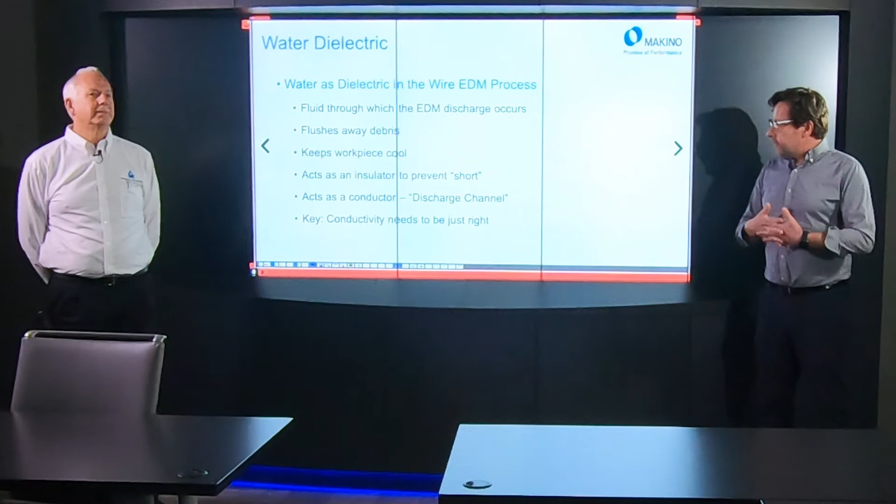So DI resin in the wire EDM. 99% of wire EDM machines use water as the dielectric fluid. And the dielectric fluid in the EDM process is the fluid through which the EDM discharge occurs. The dielectric, what it also helps with is flushing away all the debris that is generated in the EDM process. So all the small particles, get them out of the cut zone, out of the EDM zone, out of the spark area, because then if they're not flushed away, then you're going to have secondary discharges. You're not going to be able to hold tolerances or get a decent finish on your part.

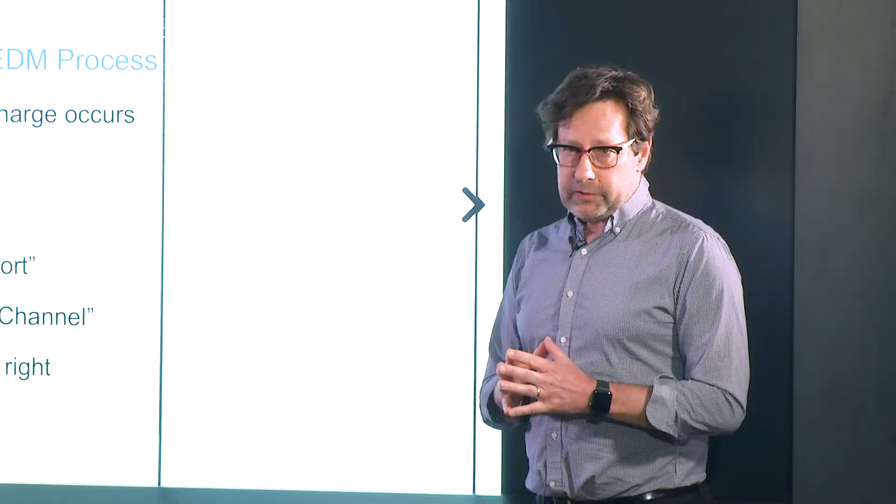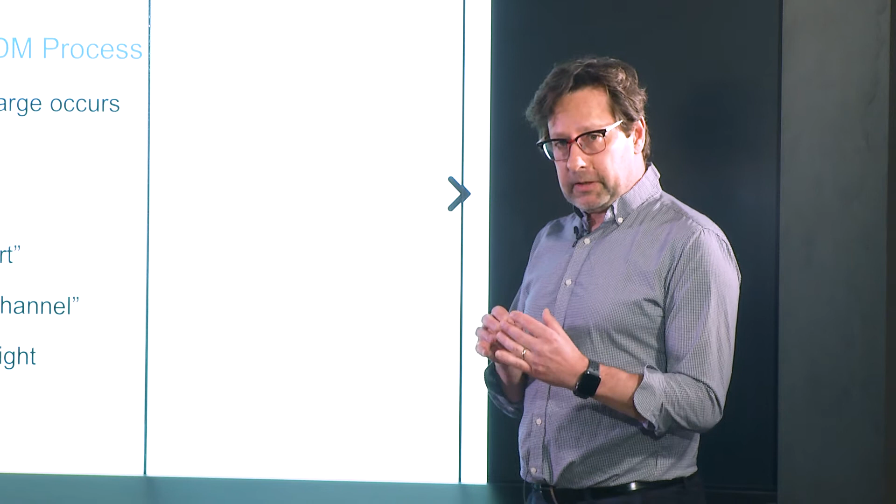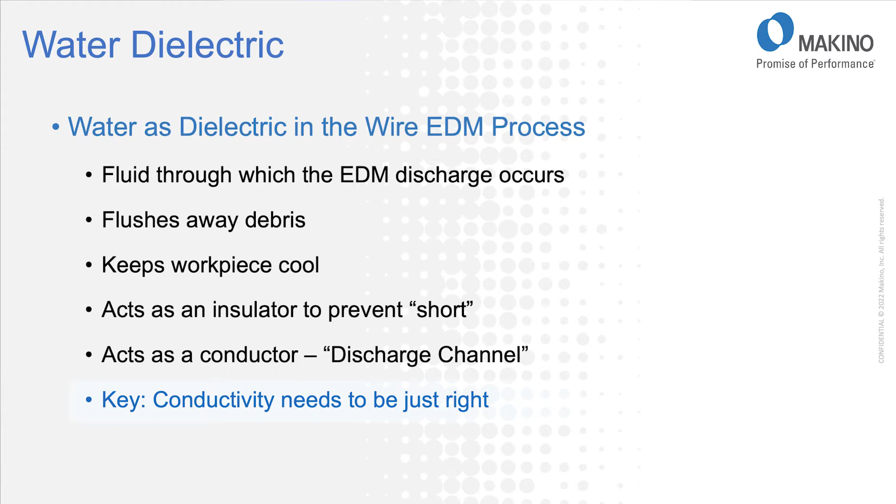The dielectric also keeps the workpiece cool, because we're working with electricity, we're working with a spark that is very hot. So in order to keep the temperature down, that's where the dielectric helps as well. The water also acts as an insulator that prevents the short between the wire electrode and the conductive workpiece. But it also acts as a conductor at the time when the actual discharge is happening. There's a discharge channel that is created through the dielectric fluid, and then we have the spark and we have the EDM process. The key for this to work correctly is that the conductivity of the water dielectric needs to be just right. But what does just right mean?

There are different recommendations depending on the machine manufacturer, but a good overall level that is typically recommended is 15 microsiemens, and that is the conductivity. There are some manufacturers that recommend to run with a lower conductivity, around 10 microsiemens. And then also depending on what you're going to cut, there can be more stringent requirements. For instance, if you cut PCD, in order to keep the PCD's integrity, it is really helpful to work with a lower conductivity. So we're trying to get the conductivity down in those applications to about 5 microsiemens.

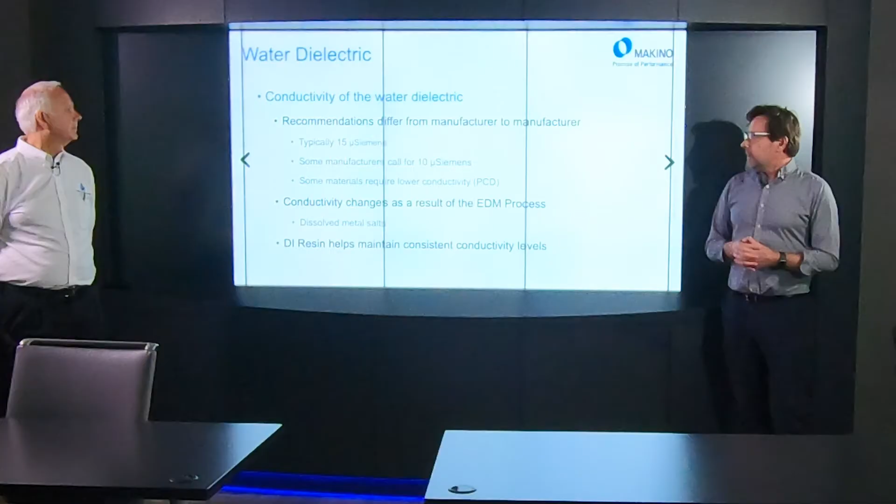Some of you may also hear a different term, which is called resistivity, and it's measured in ohms or in megohms, and it's essentially the inverse of the conductivity measurement. So they both measure the same thing, the same quality, but they're looking at it just from two opposite angles, so to speak.

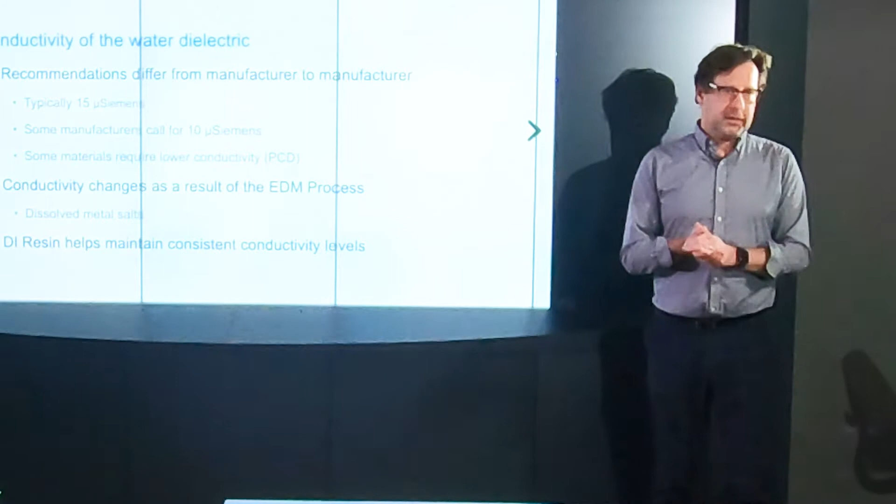What happens during the EDM process is that the conductivity of the dielectric water changes. And mostly that happens through dissolving of metal salts that get absorbed into the water. That's not that dissimilar from if you put table salt into a glass of water or into your cooking water when you cook pasta; it dissolves. And that's what happens during the EDM process as well. And when that happens, the conductivity of your fluid increases. And if it increases too much, then your cutting results are going to deteriorate, your workpiece quality is going to go down, and your overall EDM results are not going to be where you want them to be. And that is exactly where the resin comes in. The resin helps to maintain your water's conductivity levels at the desired point.

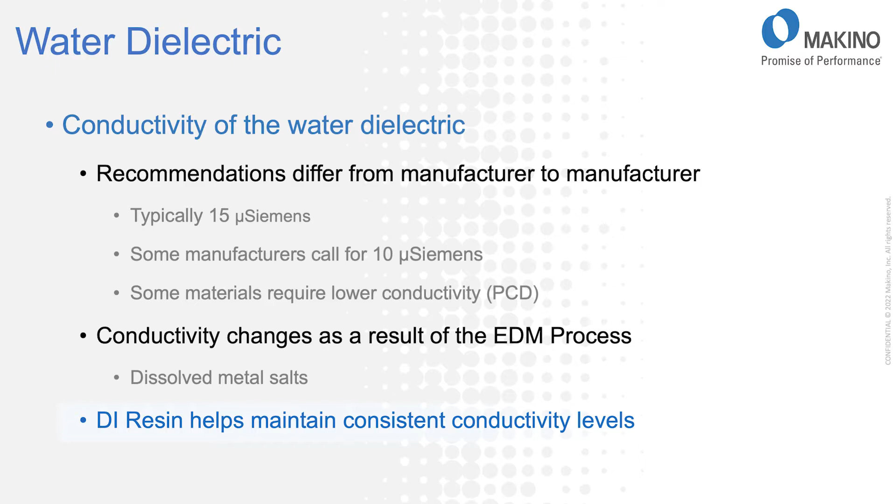Now that we've covered the reasons and the theory of why we need resin to maintain the dielectric in the EDM process, I'd like to hand it over to Bruce Iverson, president of Nationwide DI Water Solutions, to give us a little bit of a glimpse behind the scenes of what happens with the resin when it reaches back to the regenerator or to the manufacturer.

Because, as I think most of you are aware, the resin itself is reused in most cases. So we send it to you, the end user, and once the resin life is exhausted, it comes back to us and we hand it over to Bruce to do a regeneration process on it. So we're not throwing things away; it's almost like a recycling process, I would say.

So Bruce, if you can go ahead. I'd like to thank you, Mark, for having me here today, and Makino and SST for making me part of this video on resin and how it works with the EDM machines.

I have been in the business for 36 years, and we have a total of 8 employees at Nationwide DI out of the Midwest facility, and we actually have another facility in Chattanooga, Tennessee that houses product so we can ship. The main regeneration of the EDM resin is all done in Elgin, Minnesota, and from there we ship back and forth from our Tennessee facility. We've got 5,000 square feet and 2 employees in Chattanooga, which will serve the southeast and some of the East Coast. That way we can help out on the freight charges.

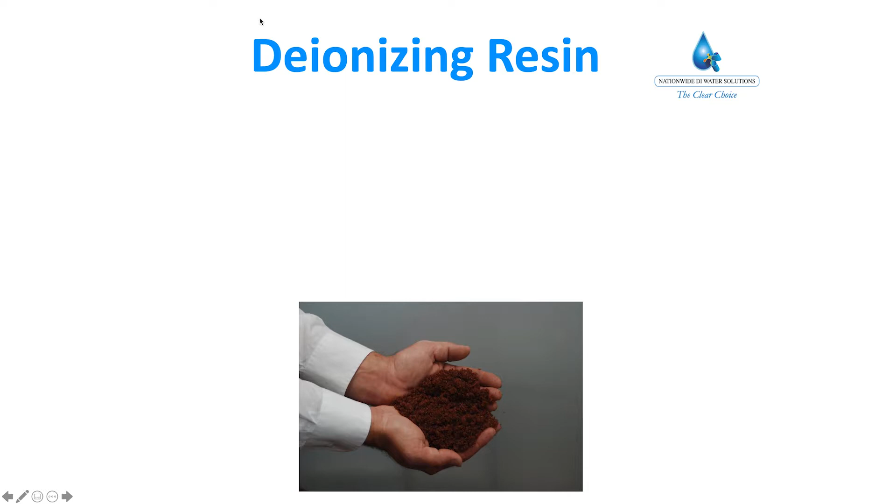Some of us have seen resin, sometimes unfortunately if it's spilled on the floor or if somebody opens a resin bottle. So we kind of know what it looks like, but what does it consist of? Deionized resin beads, if you've ever held them, are little plastic beads; they're a petroleum-made product. There are 2 beads in the resin: one is a cation bead and one is an anion bead. The cation bead is regenerated with hydrochloric acid and holds the positive charge. The anion bead is a negatively charged resin that is regenerated with caustic soda.

Something we sometimes notice is that the color of the resin changes, even on the new product. Does it matter? Does it indicate any kind of differences? On the new products, sometimes people see black beads mixed in with gold beads in the resin, and the black beads are just a dye on the resin, mostly done on the cation resin.

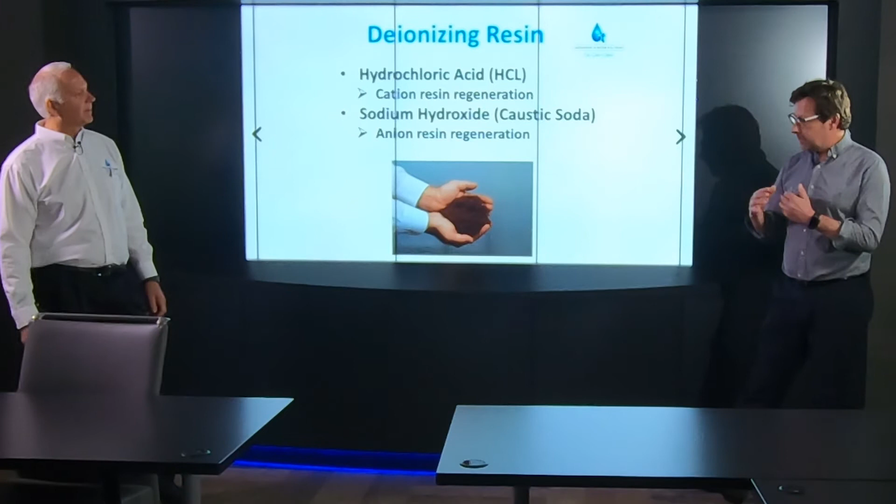The reason that is done is for the separation. When you go through the process, you have to separate these two beads in one separation tank, and by having different colors you can actually see that line for the separation. When they're both gold, it's a lot tougher to see because you have to pull one off of the other. I think we're going to see that when you talk about what the resin regeneration process looks like. Yeah. It's not a quality feature; it really helps just for the regeneration process.

A lot of customers, if they get a virgin product in and see some color in it, right away think this isn't good resin, and it is good resin. It's just got a different colored bead in it. Mm-hmm. What am I looking at?

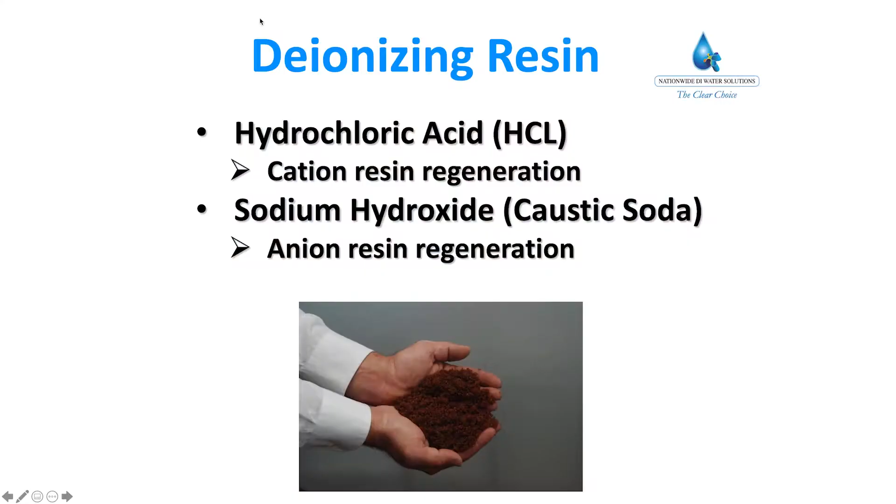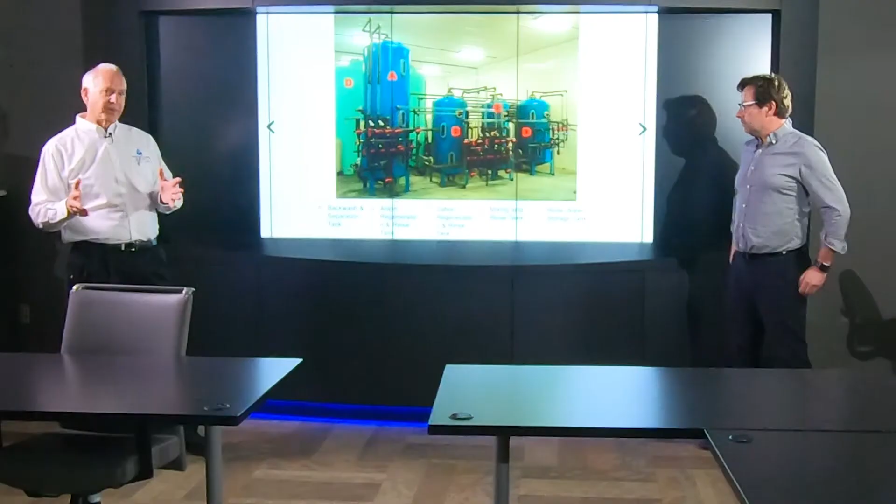This is the regeneration plant, and these are the steps that we take for the process of the regeneration. So we take the exhausted tanks that customers have sent in after they've been depleted and used. We take them, whether it's tanks, 55-gallon drums, or bags, and we have a 60 cubic foot process that we use. So we take several different customers' resin, and we'll fill A, which is the separation tank.

So we'll fill that with 60 cubic feet of resin, and that goes through a backwash process, as we were talking about earlier. So that's where you separate the cation from the anion? Yeah. The cation is a heavier resin, so the cation will always go to the bottom, and the anion will float on the top. As you're flowing water up through that backwash tank, the two resins separate, and you get a line, and that's where we take one off the other.

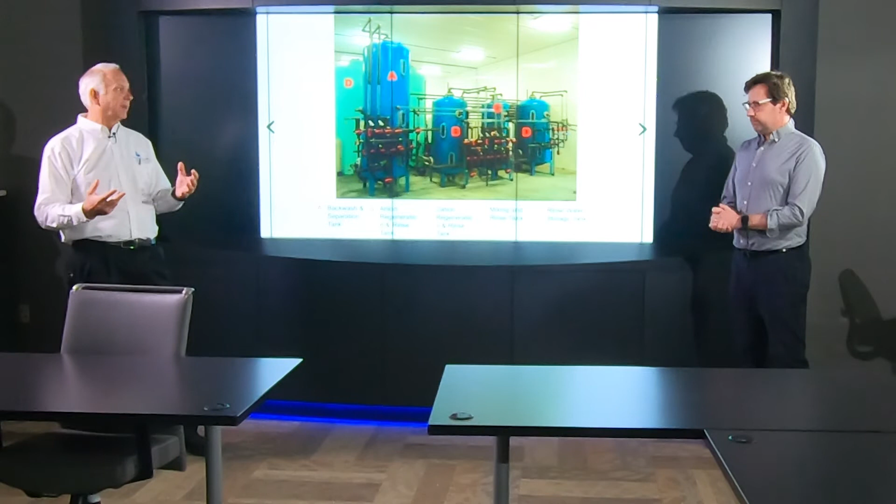So why do you have to separate them in the first place? Well, the reason we separate the anion and cation is they have to go into their separate resin vessels, B and C, for regeneration. Do you use different chemicals? Yes. The anion is regenerated with sodium hydroxide, caustic soda, and the cation is regenerated with hydrochloric acid, HCl. You can't mix those two chemicals together because you don't get a good result. So that's where the backwash and the separation comes in.

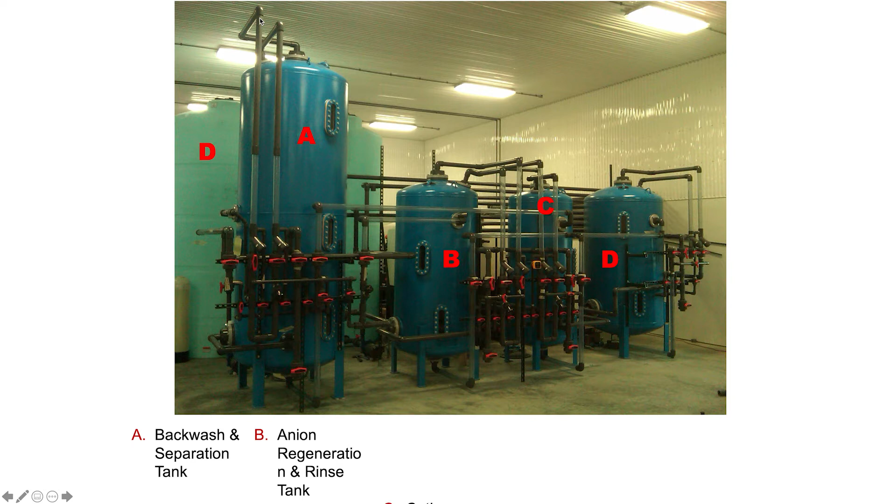Once the separation is done and the two are removed from the separation tank, they go into their own vessels, where the chemical process is done in each of the separate tanks for regeneration. After the regeneration process is done, we move both resins, after they've been rinsed, into vessel D, which is a remix tank. We mix the two resins back together, dump them into a tank, dewater that resin, and then we can place it back into the tanks, bags or barrels, however we're going to ship it.

And how long is the whole process, or each step of the process? I would say the whole process for regeneration of 60 cubic feet is between 3 to 4 hours, from the start of the backwash through the chemical process of regenerating and the remix. So when I said we can get 120 to 180, it all depends on how long of a day we work.

Sure. And using those chemicals for the regeneration process, can you reuse the chemicals, or do you need a new batch every time? In our process, we actually reuse some of the chemicals. By reusing some of the chemical, we're able to save on new chemical, which helps environmentally, and with the cost of the regeneration process.

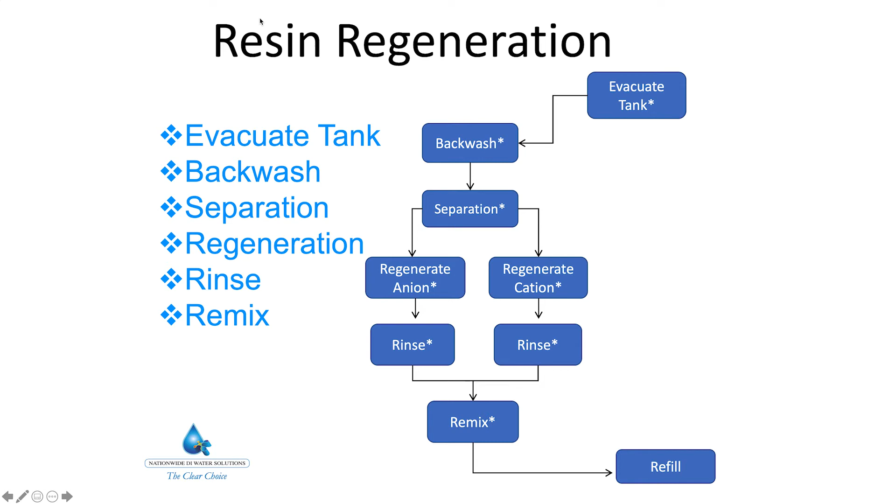Next step would be the backwash process to backwash and separate the anion and cation, and then we go into the regeneration mode of the anion and cation separately, and then we go into a rinse mode where we rinse the anion and cation with pure water to remove the chemicals that were part of the regeneration, and then we go back into the remix of the two, and then we're ready to refill the customer's products.

There sometimes used to be separate resin tanks or vessels, so there would be a cation and a separate anion vessel. Would something like this make your life easier theoretically? I think years ago you did see some of that happening, and I think the industry has, for the most part, on the EDM machines, gone away from the two separate tanks.

I think one thing is, now you've got your anion and cation in one tank, and a lot of times you've got shipping issues if you're shipping two back and forth. And sometimes, depending on what you're cutting, you're not going to get the quality of water through your cation and anion separate beds that you will through a mixed bed. And I believe they also deplete at a different rate as well. They do, yes. Okay, so that would really just add a lot of. Correct. Maybe it would make your life easier, but it's not very practical.

Well, and it's funny you should bring that up, because in our regeneration resin mix we do a 60-40 mix. So we do 60% anion, 40% cation, just because, as you mentioned, they exhaust at different times. So if you do a 50-50 mix, the anion's going to actually exhaust quicker than the cation resin. So it doesn't do you any good to do that 50-50, or if you're doing an anion and cation separately, one's going to exhaust quicker than the other.

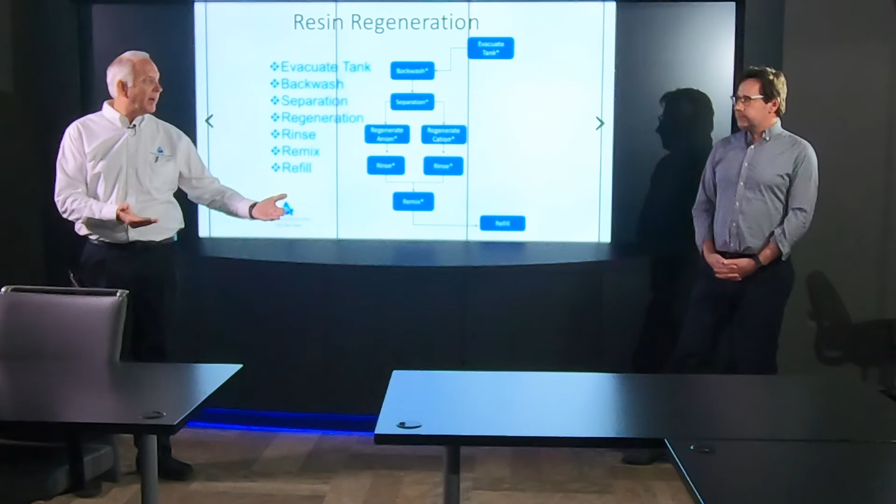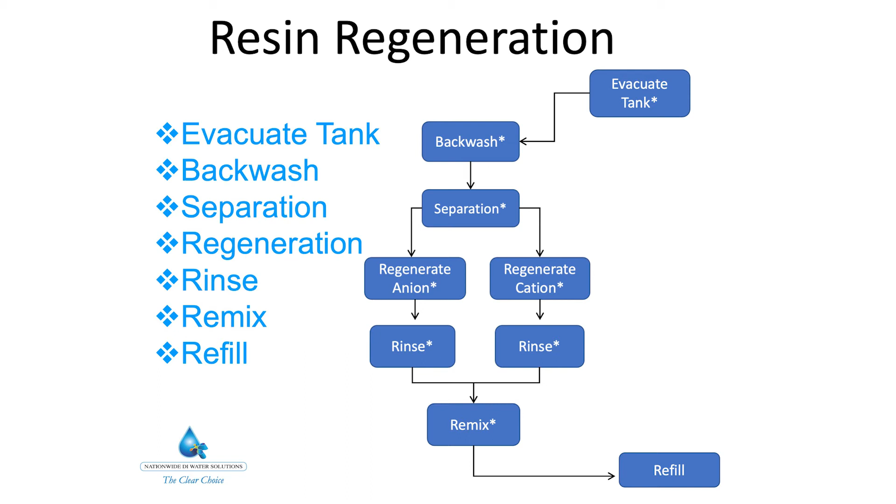Okay, that's good info. Also, going back a little bit, a general question about you and the company. So this is the process for EDM resin. Do you also handle resins for other industries, or different types of resin? I mean, resin is used not just in EDM, obviously. I think EDM is probably just 0.00001% of what resin is used for.

Yeah, a lot of your professional window washers will use it for spotless rinses. A lot of your car detail shops will use it for spotless rinses. We do business for some labs that are doing testing in the food industry.

So, back to your car wash or window washing, right? That would be an everyday occurrence where we see the effect of those dissolved mineral salts or metal salts. Once the water evaporates, that's when you get the water spots, right? Correct. And that's what the resin takes out. So, in essence, removing all the salts and impurities in that water. In the EDM world, it's very important to have the right conductivity for your EDM machines to run correctly for the operators.

So that's all I have for today. And Mark? Well, thank you, Bruce. I appreciate you coming in today, and we'll continue this conversation in a few weeks. We'll go a little more into the water treatment and quality aspects of your process, and also a practical review of what's typically out there in an EDM shop in terms of resin setups, and a couple of tips on the machine where we'll show you a few things.

Thank you, Bruce, for coming in this afternoon and giving us an overview of your company, of the process, and what you do to keep the resin running, which keeps our wire EDM machines running.